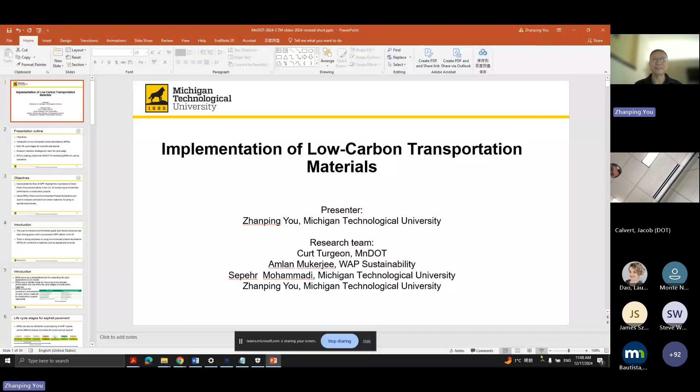All right, wonderful. Again, it's my honor to be asked to present this topic, it's a project in progress. I'm pleased to work with a really good group of people, especially a few people really: MnDOT's Curt Turgeon and Amlan from Michigan Tech in the past, and currently WAP Sustainability. So it's a really great team to work with.

And of course, other than that, we also have a group from Washington State, so Washington State Department of Transportation, along with University of Washington. So basically we have a really good team to work with. University of Washington team mainly works with WSDOT on their part, and Michigan Tech works with MnDOT on our part here.

So the topic I'm going to talk about today, I want to give a really brief outline. First I will talk about the objectives, then I'll briefly introduce the EPDs, and then we talk about the main life cycle stages for asphalt, even though I put concrete here also.

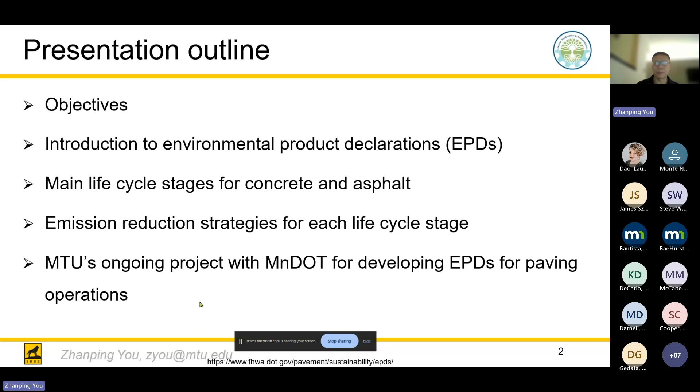The objectives: there are two objectives. One is we are trying to demonstrate the role of different strategies, and highlight the importance of the green public procurement effort in the U.S. For this case, it's trying to enhance environmental performance in construction projects, for us really asphalt paving projects.

And then, of course, the other is to utilize EPDs, to show how environmental product declarations are used to compare and select low carbon materials, focusing on asphalt, especially for asphalt. We have not really done anything for glass or steel, but mainly focus on asphalt. Of course, Michigan Tech also has a team doing the concrete work as well.

And then briefly about introduction: the push to enhance environmental quality and reduce emissions has been driving the green public procurement effort in the U.S. And also, of course, there is a strong emphasis on using environmental product declarations for construction materials, especially for asphalt and concrete.

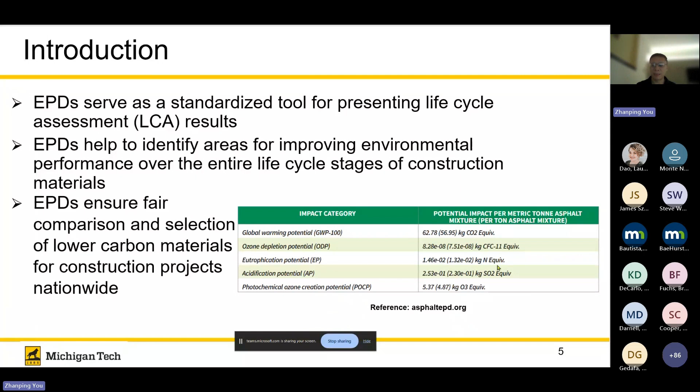A few more examples I'm going to show. Earlier on, those numbers you saw are only for the product. So when they make the product, how much greenhouse gas emission is going to be produced - that we usually call cradle to gate. What that really means is when you produce asphalt mixture, first you need to produce asphalt liquid and aggregates, and maybe other additives as well. That's what we call raw materials processing, and we use A1 to represent it.

For A2, that is the transportation of those materials to the asphalt plant. So for example, if your asphalt is from Texas, now you transfer your asphalt from Texas to Minnesota. And the aggregates also - if your project is in St. Paul, you have to transport your aggregates, let's say from St. Michael's - I'm just making this up. So that is the shipping cost, the shipping part of the effort.

That's A2. A3 includes the asphalt mixture production in the asphalt plant. So basically, from the cradle, from nothing, to a product. So right now you have whatever tons of asphalt mixture - that is cradle to gate, A1, A2, A3.

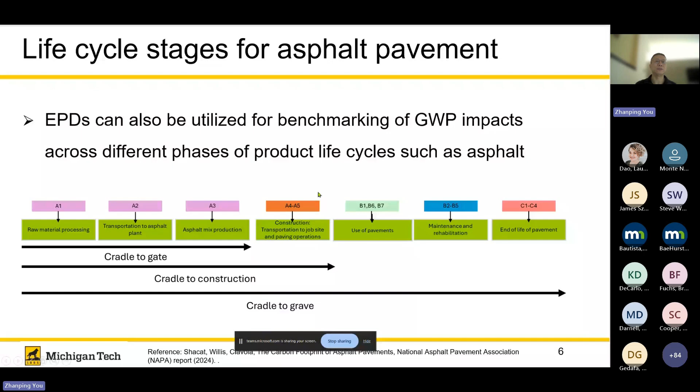So in general, EPDs can be utilized for benchmarking of global warming potential impacts across different phases of the product life cycle. For example, this entire life cycle: we produce asphalt, produce aggregate, then produce asphalt mixture, do the paving, get the pavement ready, use the pavement, do maintenance and rehabilitation, and then the end of life of the pavement. So the entire life cycle - it's a really great tool to use as a benchmark of greenhouse gas emissions.

Next few slides, I'm going to briefly introduce each one of those efforts, especially all the A's - A1 all the way to A5. A1 to A3, that is cradle to gate, as we just saw earlier. The source of greenhouse gas emissions in the cradle to gate stages includes three things as mentioned earlier: the extraction and processing of raw materials - you produce aggregates, produce asphalt. That's extraction and processing of raw materials, A1.

For most of the cases, A1 is pretty significant. For example, in this case here, A1 is occupying almost 57% of all the CO2 in this asphalt mixture. And then another one is called A2, which is transportation of raw materials to the asphalt plant. So when you finish getting all the asphalt and aggregates ready, you ship those things to the asphalt plant - that's A2. For this case, it only takes 5%. That's a small one. However, in some cases, A2 can be very significant if the shipping distance is really far.

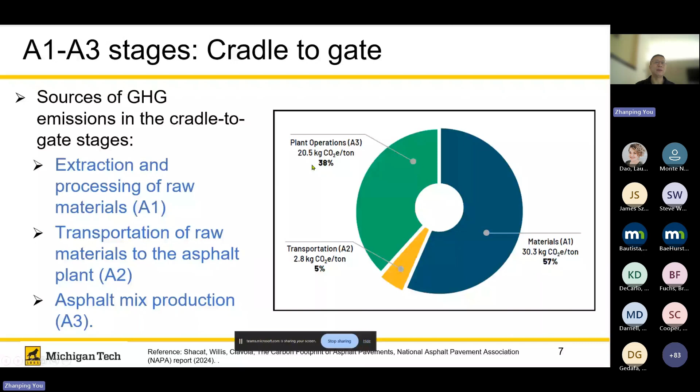The environmental impact associated with the A1 stage of the conventional asphalt mixture is determined by pretty much all the asphalt mix design choices. For example, in the asphalt mix design you might say, okay, I'm going to use 20% natural sand, 20% gravels, 20% crushed aggregates, and whatever other materials, plus 5% asphalt. That's pretty much what determines how much A1 is.

A2 is really impacted and plays a pretty good role. It depends on the availability of aggregates and other mix ingredients at local levels, because that's mainly about transportation. So where it is, if you need to ship those materials, that's something we have to consider.

A3, however, is talking about the mixing procedures. The mixing process is really controlled by mixing producers and contractors. For our case, it's really the asphalt plant - what asphalt plants they're using, what burner type, what fuels the contractor or producer is using. That's really what A3 is about.

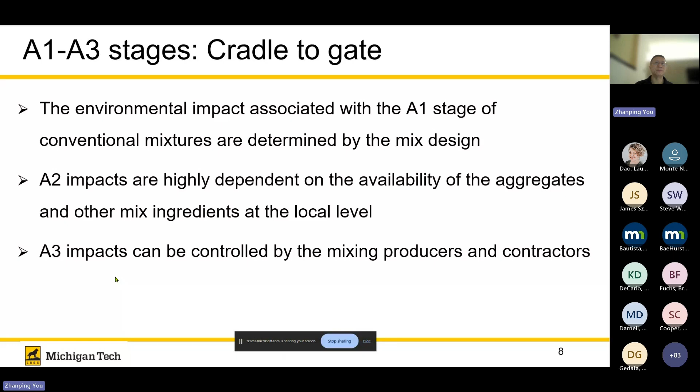A few examples about the A1 impacts. You can see this picture is really a global warming potential intensity factor for different materials. For the neat binder, for example, it's 570 kilograms equivalency per ton. That's a pretty significant number.

But if you take a look at SBS, and then the ground tire rubber, which is the waste tire rubber, at 8% content in asphalt binder, you can see that's 558. That means tire rubber is a good thing to use because eventually you're going to have lower EPDs.

Now take a look at lime. Lime, however, is really significant - lime's greenhouse emission could be really significant. It's easily double what you have using asphalt.

Other materials which are really good: one is RAP, which is only 0.71 - very good. And of course the aggregates are also not too bad, at 1.76 for most materials.

The reason lime is really used, of course, in a lot of places - for example in Colorado, they use lime - which is 700 times more than virgin aggregates in terms of global warming potential intensity. That's something we really have to consider.

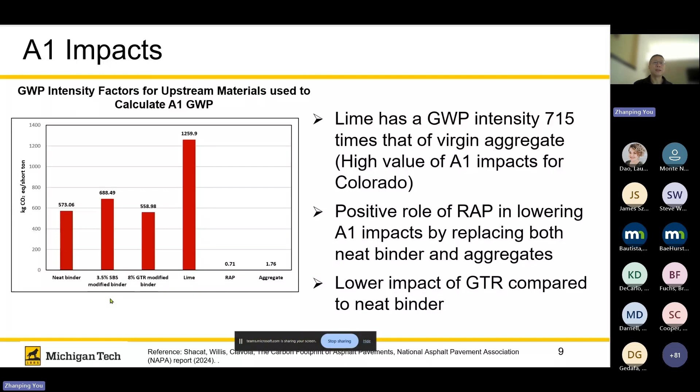That's A1 impacts. In the A1 impacts, usually in asphalt mix design maybe about 95% by weight is aggregates, 5% is binder. But the contribution to impact from each is really different. Per tonnage, aggregates produce only about 1.7 kilograms of CO2, but binder produces about 28.7 kilograms on average. So it pretty much flips those numbers - binder has significantly significant CO2 emissions.

So significant contribution of binder, due to the emissions during crude oil extraction, transportation, crude oil to refineries, and refinery operations. All that process really has a major contribution to the CO2 emissions, to the greenhouse gas emissions.

The role of additives replacing the binder is a key factor for reducing carbon footprint. There's a lot of work being done - NAPA reported 8% tire rubber in asphalt can reduce the global warming potential, or reduce CO2 emissions roughly from 631 to 616 kilograms. Of course, that's only talking about A1.

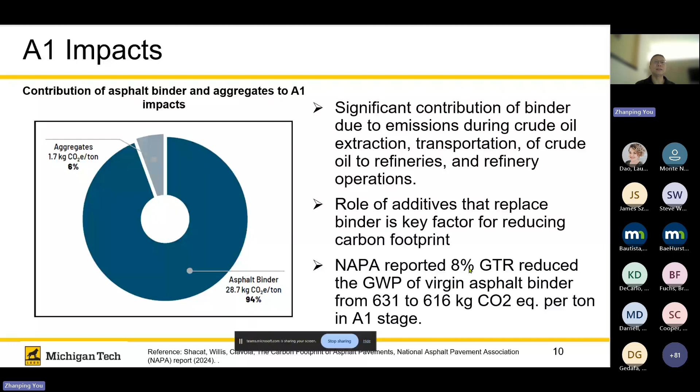Another thing we mentioned earlier is about RAP - the role of RAP is really interesting here.

So for a given mix design, if there's no RAP, for example, you can have 30 kilograms of CO2 equivalency per ton of asphalt mixture. If you are using RAP, this number will be different. With 20% RAP, it declines to about 24 kilograms. If you increase further to 50% RAP, it can drop to 15.5, almost half of the mix without RAP. That's really great to know. So if we are going to use low carbon materials in the future, that's one thing we can consider: including RAP, or more RAP. That's the RAP impact for A1.

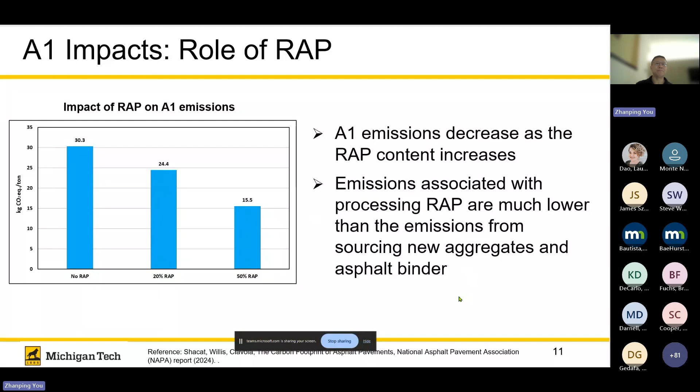For A2, that's transportation of materials to the asphalt plant. We calculated this based on the combined transportation impact of aggregates, binder, RAP, and all the ingredients we're using. It can be significant if the hauling distance increases. So if you're purchasing asphalt, aggregates, or RAP from a long distance, your A2 could be pretty high. A2 can be high depending on where you are, especially nationwide. Louisiana and especially Florida don't have a lot of aggregates, so they have to get their aggregates from Canada, for example, and then you have very high A2 impacts. The shipping distance is high - even using water shipping, it can still be really significant.

Of course, Minnesota doesn't have that much of an issue, and Michigan is also in a pretty good situation too.

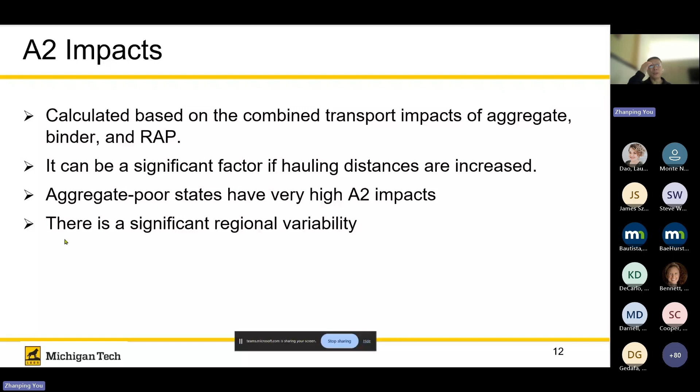For the A2 impacts, like I just mentioned, this shows global warming potential using kilograms of CO2 equivalency per ton of asphalt mix. You can see some states' data here - I got this report from NAPA. Louisiana and Florida are pretty significant, very high. In Michigan and Minnesota, those numbers are generally lower, so we get some medium numbers here. The Michigan numbers are ones we produced with a contractor - on some projects we worked on, we tried to convince them to use these concepts and input that data. Those numbers are available, and we also have some data from Minnesota.

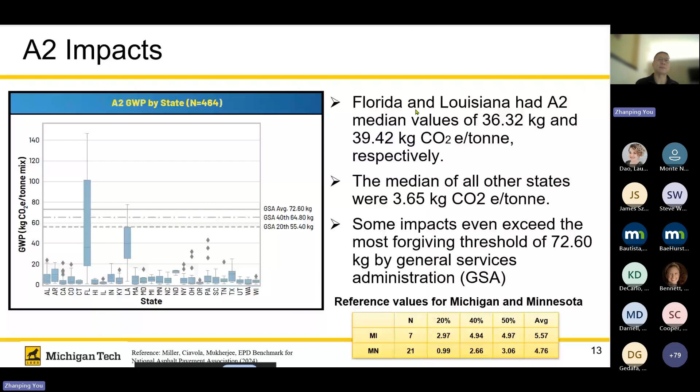Here is the RAP impact on A2 transportation. If no RAP, it's 2.8, but with RAP, say 50% RAP, this number becomes 1.9. So RAP can also have a very positive impact on A2 emissions, especially since the hauling distance for RAP is shorter than for virgin aggregates. That makes a lot of sense - that's the RAP impact on A2.

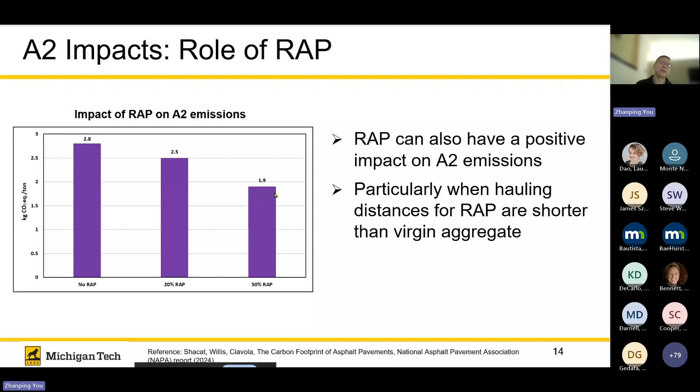A3 is the mixing in the plant - emissions from on-site fuel consumption. Let's say the burner uses natural gas or some other heating oil, whatever that is - that's emissions from fuel in the asphalt plant, and those are counted here. Also, if you're using electricity, we need to consider the upstream electricity production, which are indirect emissions - that also needs to be calculated. Fuel consumption, including burners, hot oil heaters, on-site generators, and operational equipment in the asphalt plant such as trucks and loaders, need to be accounted for in the A3 stage as well.

The burner fuel in general is the largest contribution in most cases. For example, this graph shows that almost 77% of all CO2 is generated by the burner, with some other contributions from equipment, hot oil heaters, and electricity making up smaller percentages. The burner is the big one, so this tells us that if we improve our burner efficiency, we can potentially reduce CO2 emissions.

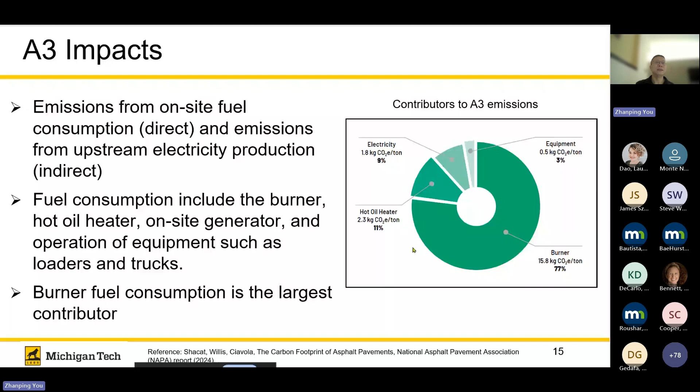And we also talk about in the production of the materials, we also really need to consider the warm mix asphalt. So in this project we work with MnDOT currently, we really find one warm mix asphalt project. I'm going to talk about those things a little bit later.

So in general, if a hot mix asphalt plant, for example, in the plant operation, produces 20.5 kilograms CO2 per ton of asphalt mixture, that's a normal situation. If you use warm mix asphalt and reduce the temperature by 30 degrees, the emission will reduce to 18.6 kilograms CO2. And if you can reduce that further, let's say go down 50 degrees, that's really a lot of difference. You can see here the number becomes 17.3. That's a pretty significant reduction in CO2 emissions.

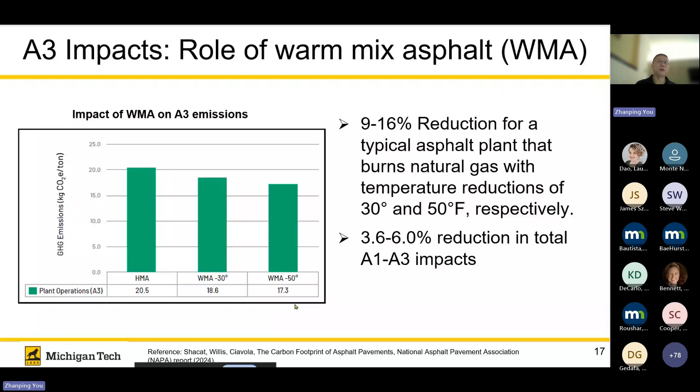A4 and A5, we just mentioned earlier on. A4 is mainly the transportation of asphalt mixture from plant to the job site. A5 is the construction stage, the operation, the paving operation, roller operation—pretty pure construction, not including the shipping. The construction-related greenhouse gas emissions for asphalt pavements are relatively low in general, typically about 10% or less of the combined A1, A2, A3 numbers. So usually they are small.

However, for every single operation, every single transportation for A4 and A5, we still want to really make sure those things can be reduced, so that we can get a better life cycle EPD, smaller. So the fuel consumption during the transportation of materials to the job site, that's A4, and then the fuel consumption associated with the paving operations will be A5. You see here, even though both are fuel consumptions, they are different. They should not be combined together.

So A4 is for any transportation, all the trucks, right? They use the fuel, those should go to A4. But anything like rollers, pavers, and water trucks, all those things during construction, that fuel consumption should go to A5. So we also notice that if the shipping distance is long enough, then you will definitely see increase in emissions for A4, A5.

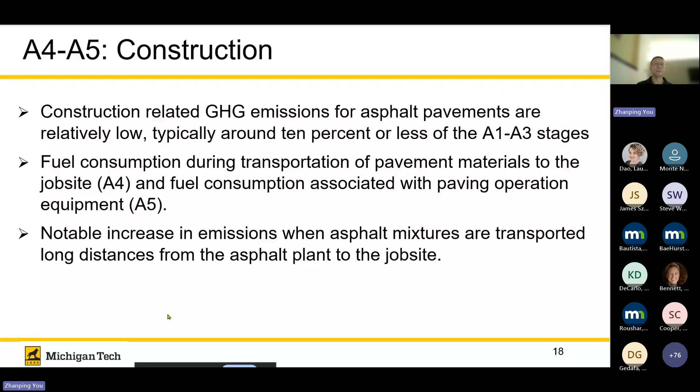Of course, I'm going to show you one slide here of Michigan Tech's currently ongoing project. We mentioned it earlier, A1, A2, A3, A4, A5, right? A1, A2, A3 is pretty well known, that's the currently cradle to gate situation.

So people really have a lot of good handling of those things, and asphalt plants are able to produce those numbers because they know where their material is purchased from, where it's come from, where's the asphalt, where's the aggregates, and what's the transportation distance, how much fuel potentially can be used. And A3 is they know their plant. So supposedly A1, A2, A3 can be handled by the plant.

A4, A5, that is the focus area where we are trying to work, because we are trying to really include not only cradle to gate, we really want to say what's the cradle to construction. So cradle to construction, that's really A4, A5 has been introduced here.

And then of course in our work, we really collect data, collect all the data. I'm going to show you the data a little bit later, and then use the life cycle assessment and EPD tool to understand this data, and potentially we can have some benchmarking evaluations.

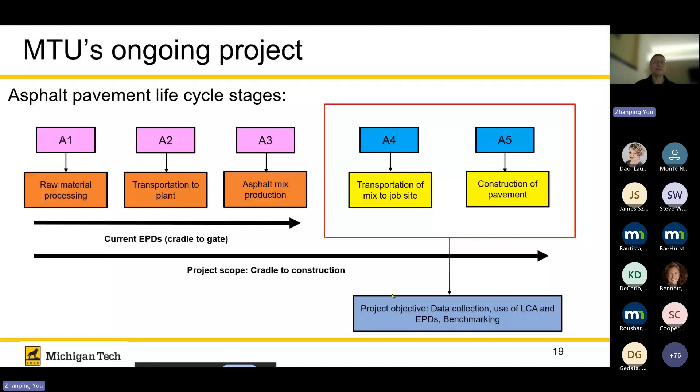So in the current project we are doing, we are going to use LCA and EPD tool to explore a strategy to measure and reduce the carbon footprint. Of course the goal is still the same, we are trying to reduce CO2, and we have been working with MnDOT and industry partners over the past year or so. Pleasantly, we got really big support from MnDOT, and we also got really good support from the contractors and the MAPA.

So actually MAPA - I got really good support with a group, and eventually we are also planning the training, tied in with the project for the low carbon construction material program, to provide training on carbon emissions measurement and reductions.

We are also trying to use LCA tools and LCA data on all the MnDOT projects we collect - A4, A5 data, in addition to A1, A2, A3 data. Then we use the tools to integrate together. Our goal is to give a first shot at seeing how we can generate potential procurement specifications.

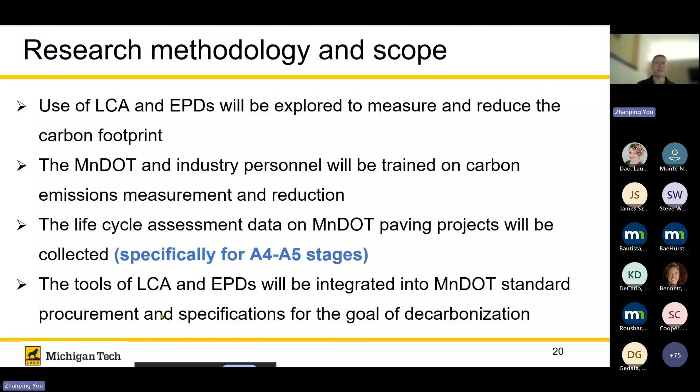So that we have good handling on the goal of decarbonization. I know for the project we are doing currently this goal seems really big, but we are trying to achieve a small one first. For project selection, in the project we are working on currently, we made a short list of 14 projects - 12 from MnDOT.

One project is a warm mix asphalt project in the city of Minneapolis, and another is a hot rubber chip seal project funded by the National Road Research Alliance, plus Michigan DOT. I'm glad to work with these partners - it's good to work with the city of Minneapolis, and also MnDOT and NRRA on the chip seal work.

For all the projects here, the longest is 24 miles long, and the highest tonnage of asphalt mix was 107,000 tons. A smaller project would be about 2 miles or so. We eliminated all projects from the pool which are less than 2 miles - we don't want to study those too much currently.

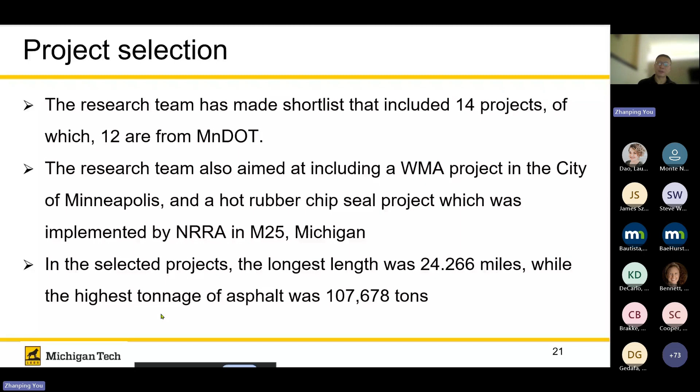That's the project selection. Another consideration is selection by location - north region, south, metro region, different locations, and contractors. We also try to use different contractors just to make sure we have good representation.

On this project selection picture, the first big column here is pretty much the available EPDs - that's cradle to gate, including A1, A2, A3. The other thing we're going to do is look for the gap - we really need to look at the construction stage, what's happening there, including A4 and A5. Again, A4 is transportation, and A5 is the paving operation, or installation.

In A5, there are a few things we want to keep in mind: understanding the pay items, contractor practices, regional practices, project size and scale, specialty mixes, and other things like work zone congestion. So that is project selection.

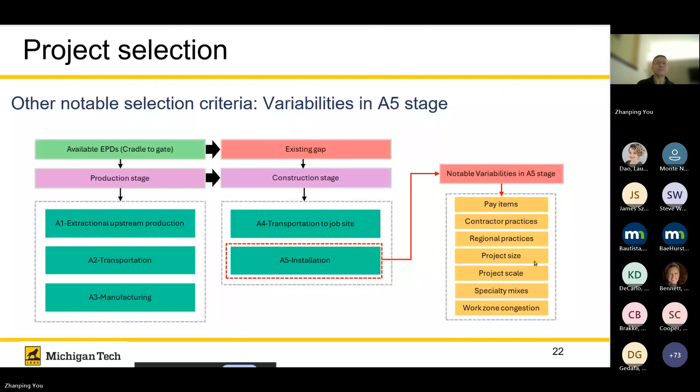A few examples of projects we visited - for this one, this is NRRA's and MnDOT's supported project, constructed in Bay County on M25. Whatever equipment we use here, like asphalt distributors, rollers, and all the trucking, everything is being monitored to understand the construction stage, especially A4 and A5.

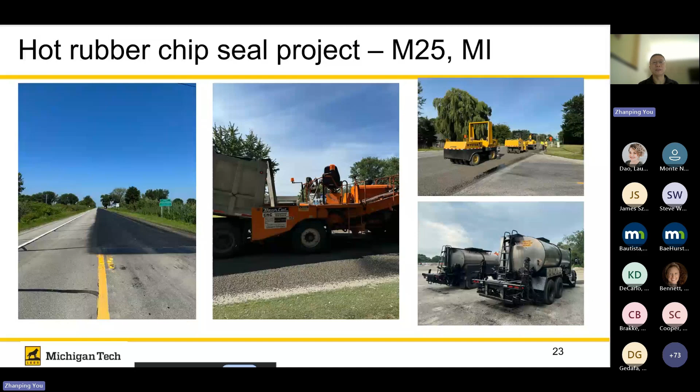Another project is a city project in Minneapolis. We found it's different compared to a highway project, because this one has a lot of corners and turns, and construction usually isn't as fast as we see in highway operations. But that's another project of interest - also because it has warm mix asphalt, the only warm mix asphalt we see from the pool.

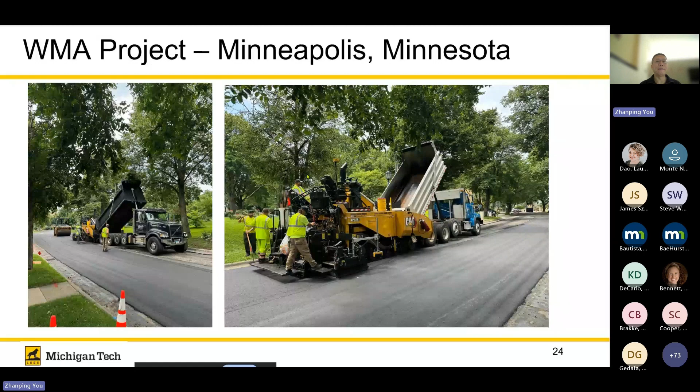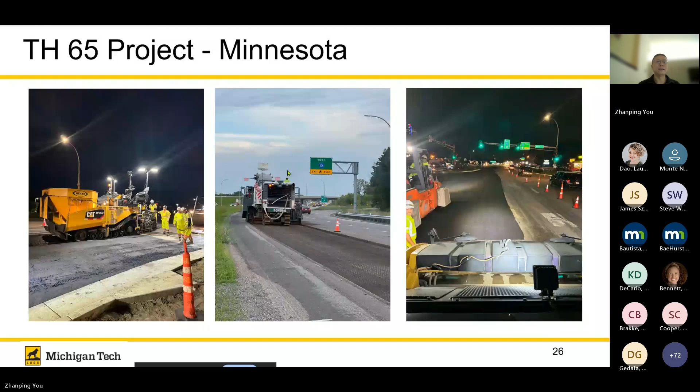We want to really see what equipment they are using - trucks, 20 trucks, 30 trucks, how many runs or trips, and construction equipment like rollers, pavers, and also milling machines, and water trucks. So for all the operations, we really want to collect the data. This one is also Highway 65.

So some examples about the data we collected. We have data for each category of equipment, for example pavers, rollers, and water trucks. For pavers, let's look at this example.

Let's assume this project has one paver, from Caterpillar. For this project, the power equipment is 230 horsepower. What's the operation speed? On average, about 36 feet per minute. It's using diesel, and fuel consumption is roughly 7 miles per gallon.

We want to know how many hours this equipment can be operating every day. Let's say today's 10 hours, and total operation days, let's assume 12 days for each project. We interview with contractors and also go to the site to check things. So let's say it's 70 gallons per day of diesel for this equipment, and the total fuel consumption for the project will be 840 gallons for the 12-day operation.

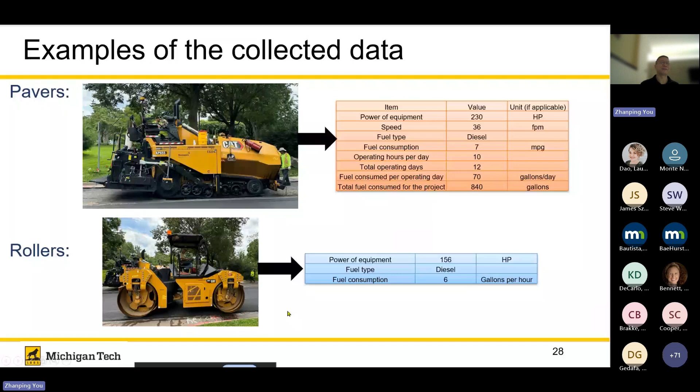So that's a paver. For rollers, I give two numbers here: the power of the equipment, 156 horsepower, and about 6 gallons per hour of diesel for one roller. Of course, on a given project there are multiple rollers around.

And A4 impacts - I'm going to briefly talk about the A4 impacts. A4 really is about transportation, the transportation from the asphalt plant to the job site. That depends on where you are.

If the project is really close to the asphalt plant, there are a lot of advantages. The short distance is always desired, recommended to reduce the carbon footprint. I have one picture here showing three projects on the screen. One project is 11 miles away, another is 30 miles away, and one is 6.6 miles away.

What we have here is we calculate per lane mile how much CO2 emissions we may have. Let's see for the 11 mile distance - the shipping cost here is about 1,000 kilograms of CO2 per lane mile. And for the 30 miles away, that one is about 2,700 kilograms of CO2 per lane mile.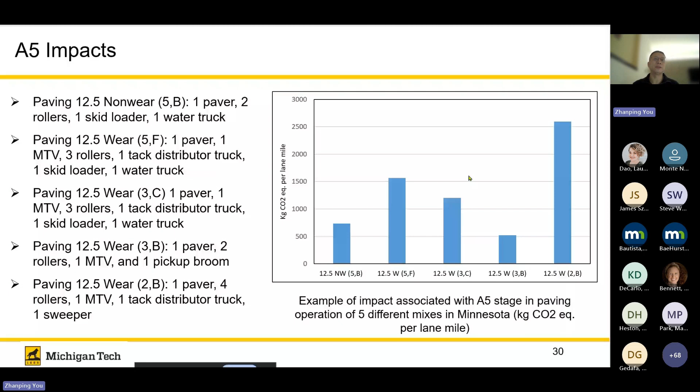With the work ongoing, I think a few conclusions I want to mention here: increased use of RAP and recycled materials such as tire rubber may offer an opportunity to reduce greenhouse gas emission by minimizing the need for virgin materials, particularly on the A1 stage. Because in the A1 stages, we already see several materials with very high greenhouse gas emission for A1, for example lime and asphalt. That is something we want to keep in mind.

Now, the second one is hauling distance. Hauling distance, especially for A2, can be a really big impact factor due to the unavailability of raw materials.

For example, virgin aggregates. In a lot of some states, the virgin aggregates are far away, so it's very hard for them to get it. So that's the reason their A2 can be really significant. And the other thing about the RAP, if the RAP distance is far away, that can be a big issue also.

Warm mix asphalt potentially can give you a really good opportunity to lower the production temperature. Because of the lower temperature, you will save fuel, use less fuel, so basically you cut the greenhouse gas emissions. That is, of course, in the A3 stages, which will be smaller.

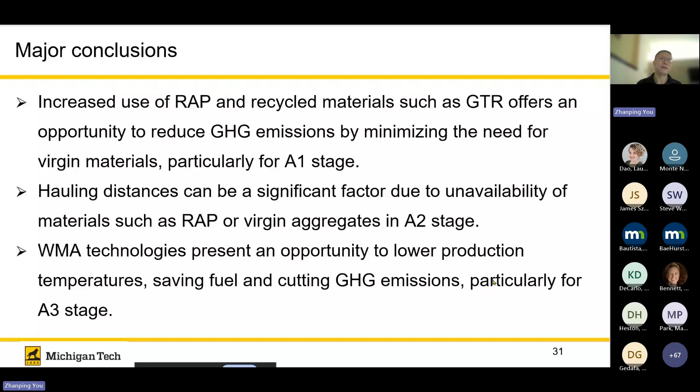I think our goal is trying to reduce, particularly reduce, if every single component, A1, A2, A3, if we can reduce those things, eventually you will have a smaller combined EPD. That's the product EPD. Of course, that's not really something we're talking about A4, A5 yet. A4, A5, we are going to talk about those things a little bit later.

Carbon footprint of paving operations is usually low compared to the combined A1, A2, A3 numbers. However, it could be 8%, 9%, 10% of the combined A1, A2, A3 stages. So that is still something we should really keep in mind.

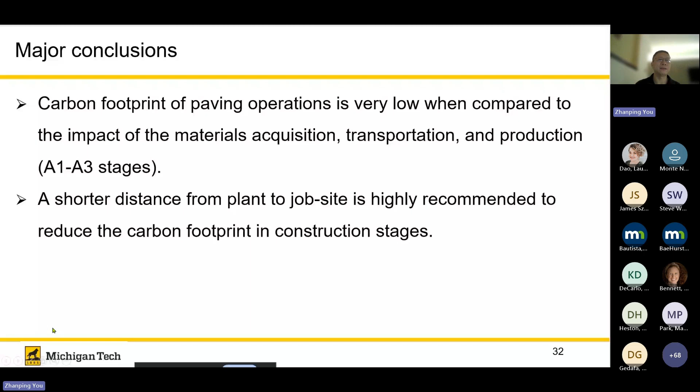If we can control that number, that's great, we should do that. Shorter distance of shipping, from the plant to the job site, is highly recommended. That is because if shipping distance is lower, potentially the trucks use less fuel, so you definitely are going to decrease the carbon footprint. Regarding A5, the construction, we still don't really have a good conclusion yet. That's where we are stopping right here.

What we are going to do next, our team is currently still working on the data analysis of maintenance and rehabilitation methods, such as milling and overlay, cold in-place recycling. We are trying to really go beyond the current state of knowledge, trying to see what other approach we can do, and find a good handle on reducing EPDs in all those stages.

We are also going to develop a specific threshold and establish a benchmark for A4, A5 based upon some of the variations. But of course, this is really a big goal. I know the project Emil just mentioned earlier on, there will be a lot of things really being developed. So of course, our goal is to integrate the serviceability-based criteria into EPDs to provide a comprehensive analysis of performance, service life, and environmental impact.

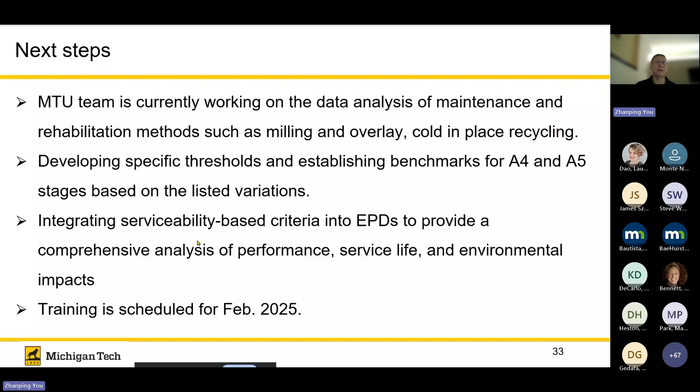And we are going to plan a training in February, that's our plan. And that's all I have for now. Again, this is an ongoing project, and it's my honor to talk about some of my understanding. Of course, if something is incorrect or anything, please let me know, and we'd be happy to work with you all.